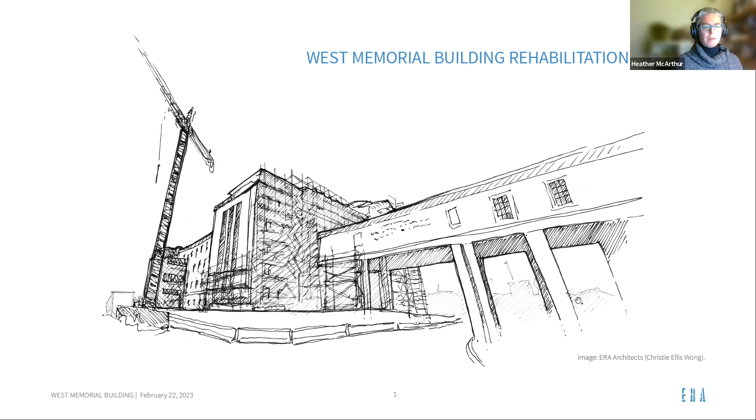I will start with an overview of the background analysis and studies that were undertaken to understand the building and its setting on Wellington Street, which have informed the conservation approach for the project. I will conclude with a brief project update illustrating how the conservation approach is being put into action in the ongoing rehabilitation work.

Starting with a brief background and historical overview of the building and its context. To situate the building and site, as Catherine mentioned, the West Memorial Building is located at the west end of Wellington Street. It's part of a monumental ensemble that was originally called the Veterans Memorial Buildings.

The East Memorial Building, which we see here on the left, was built first from 1950 to 1954, and the West Memorial Building, along with the Memorial Colonnade which joins the two buildings together across Lyon Street, was completed in 1958. The buildings are also connected through underground tunnels.

The design was awarded in the late 1940s to Allward and Gouinlock Architects of Toronto, who were involved in several projects for the federal government at the time, and I will touch on their experience a little bit later.

Developed adjacent to the Judicial and Parliamentary Precincts along what is now Confederation Boulevard, Ottawa's ceremonial route, the ensemble, and in particular the West Memorial Building, mark a prominent gateway to Wellington Street and the Federal Core.

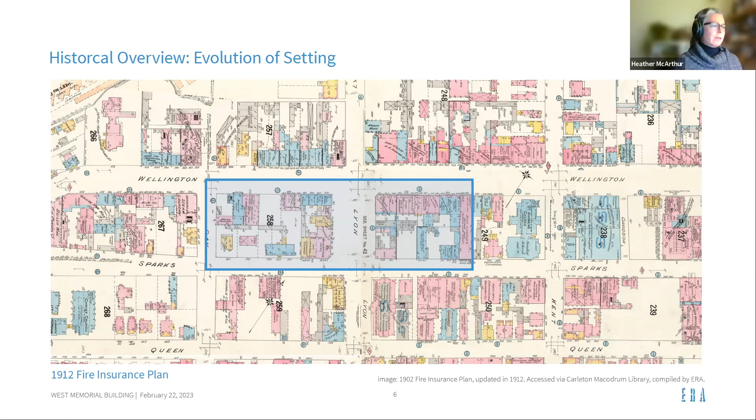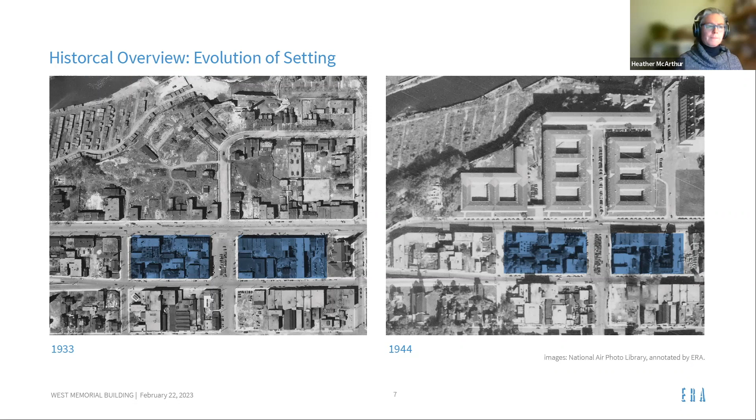At one time, there was also a market building called the Wellington Ward Market, which was located on Lyon Street between Queen and Sparks, just south of the East Memorial Building. This market building was intended to rival the Byward Market.

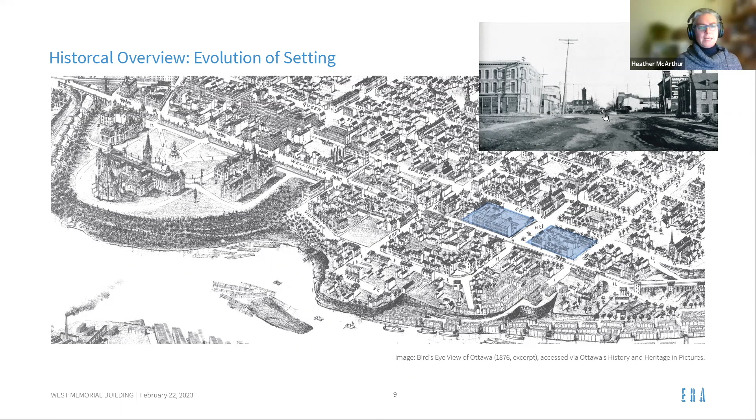As mentioned, this opening once featured a horse watering trough and would later accommodate car parking before making way for the memorial buildings. On the right, we see the intersection of Wellington and Bay Streets. This is Wellington crossing in front of our view and Bay Street going up to the right. As we know, this would become the signature view of the West Memorial Building ensemble and the gateway to Wellington Street. So we can see quite a contrast in the scale of what existed before this complex was constructed.

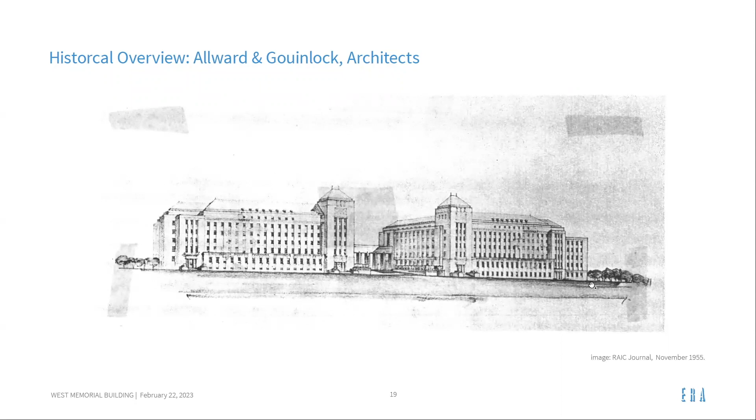It nonetheless uses a similar approach to interlocking geometrical forms which we see at the East and West Memorial buildings. The Memorial Building Ensemble has been suggested as a high point in Allward and Gouinlock's work.

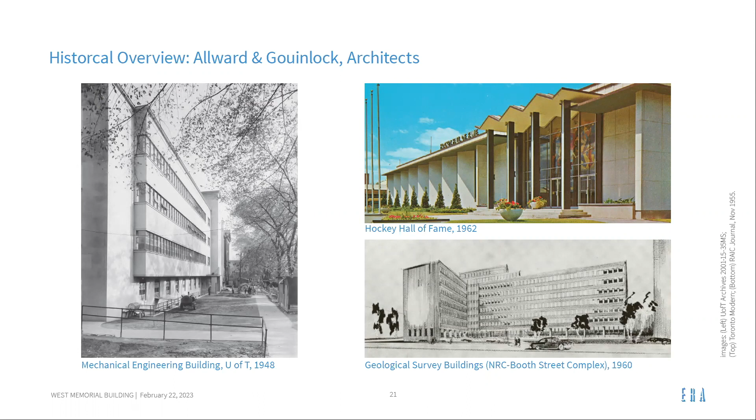So moving now to the original design of the buildings and its heritage character. Although much of Gréber's plan was unrealized, the vision for the western end of Wellington Street to serve as a gateway to the Judicial and Parliamentary Precincts was fully realized.

Part of which was to complete the town side of Wellington Street as a homogeneous and disciplined counterpart from the more picturesque pavilions, which we know exist on the north side of the street. This architectural discipline therefore called for an alignment of classically inspired building of uniform height and setback along Wellington.

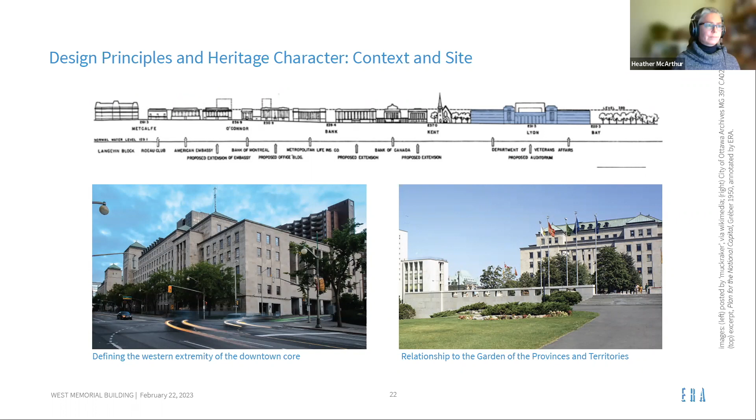The western end of Wellington would therefore be anchored by a monumental pair of buildings, which would act as a gateway with formal facades on both Wellington and Bay Streets, which we see here, this being Wellington, this is Bay, this is Lyon.

And which would dialogue with the green space that we know would come later, the Garden of the Provinces and Territories. Its integration with the nearby parliamentary precinct and with the street wall on the south side of Wellington was also achieved through the use of sloped and batten copper roofs, which acknowledged its federal context.

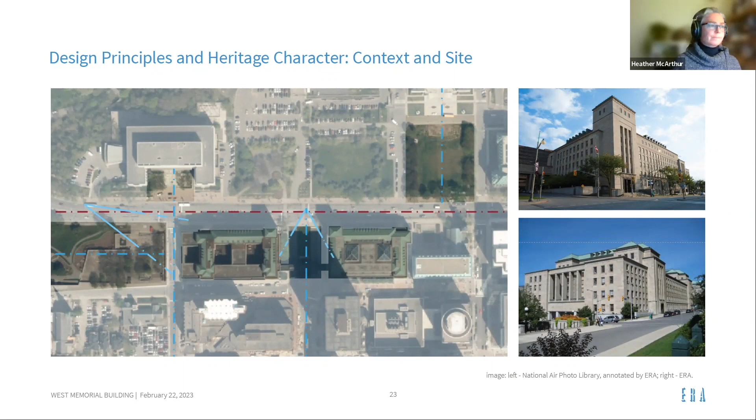The gateway function and monumentality are also expressed through the use of the classical moderne style. Elements of this style employed at the memorial buildings include a three-part composition of base, shaft, and capital.

Which are further emphasized by the stepped volume composition, highlighted here in blue, stepping back as the building goes up. This simultaneously refers back to the classical tradition, while integrating modern characteristics such as the interlocking geometrical forms, the restrained ornament such as flattened details and shallow piers, as well as the use of steel windows.

While the Gréber plan did dictate much of the design, some other notable principles are worth noting. We see the careful composition of the building facade, which connects the building to its context on all four sides, including multiple entrance points. The incorporation of Beaux-Arts influences is seen in the composition and symmetry of the ensemble, as well as the elevations, providing rhythm and proportion that reflect the interior layout.

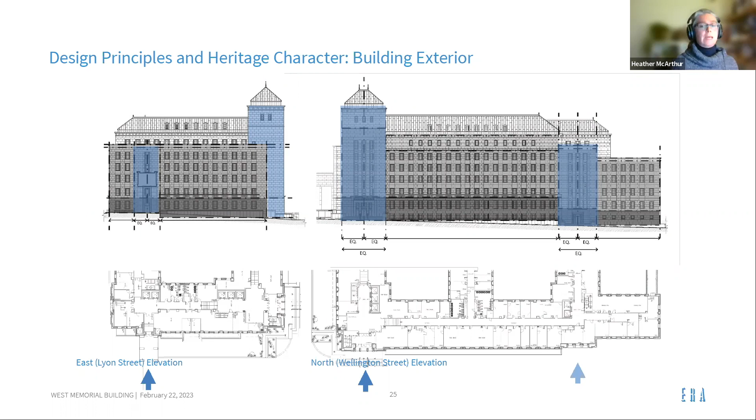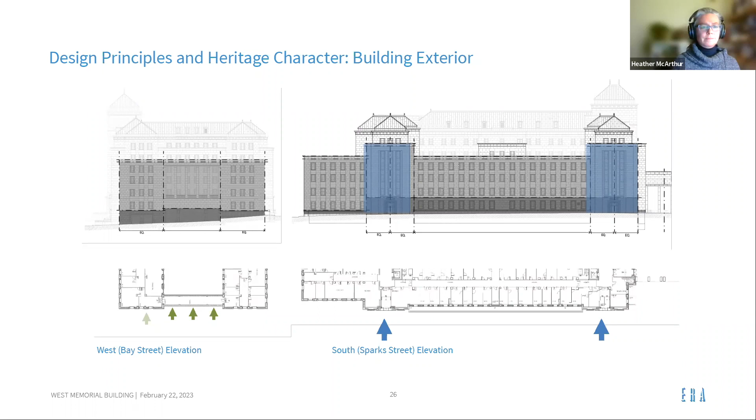Restraint of the classical moderne style also carries to a very controlled and balanced treatment of the landscape, in particular where the building meets the public realm. This approach gives a sense of grounding and permanence.

The design strategies include long window wells along the south, east, and north elevations. These are defined by granite-capped walls and contribute to emphasizing the stepped massing while highlighting the building entrances. At the entrances on Wellington Street, we see massive granite steps and sidewalls, which anchor the vertical volumes, especially at the Northeast Tower, seen here on the left.

The overlapping granite terraces along Lyon and Wellington Street further anchor the base of the building, seen here with the step planters, and then where it returns onto Lyon Street, it delimits the commemorative plaza. In contrast, on Wellington, we see soft landscaping between the entrances, which acts as a counterpoint to the hard surfaces and stair projections at those building entrances.

On the building interior, the entrance lobbies have the highest level of... sorry, let me just jump back for a second. So on the building interior, we're looking here at the circulation plans.

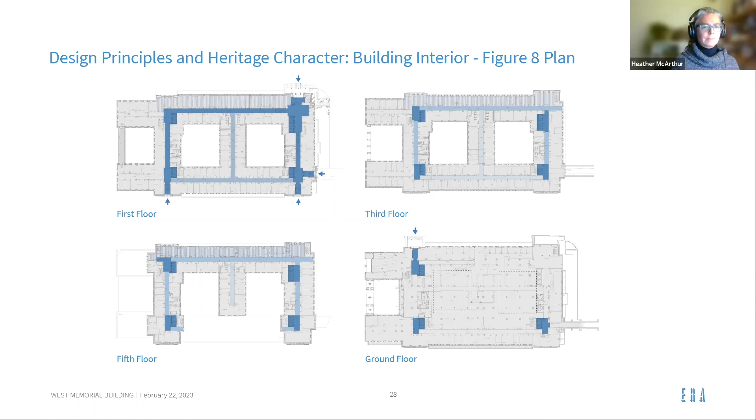The entrance lobbies have the highest level of finishes, establishing them as the most important of the interior public spaces. They're characterized by marble floors and full wall marble paneling, some of which is book matched. They also feature plaster cornices and ceilings, and painted metal elevator doors. Here we see the northeast lobby, the primary building entrance, with its material palette.

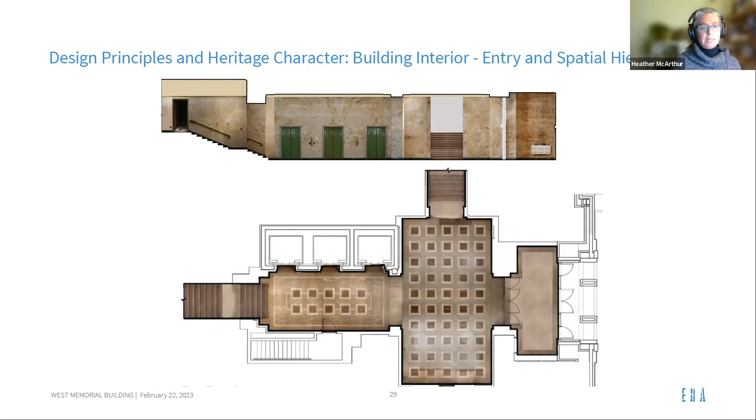The typical lobby material palette sets the stage for the character of other spaces in the building. The primary circulation, seen at left here on the main floor, has a similar material palette and expression as the lobbies on the first floor, whereas the secondary circulation, not shown, is more simplified with plaster walls and simple linoleum floors.

The fifth floor ministers' suites, seen here at the bottom, substitute the marble paneling of the public spaces with wood paneling, which speaks to the more private function of these spaces.

Although the different areas have different material palettes, there is an overall consistency in how the floors, walls, and ceilings are articulated and treated. For example, the baseboards are consistently of a contrasting material throughout the building, and the walls are often a series of horizontally stacked elements. The treatment of doors and frames is similar in all areas of the building.

Other characteristic features included an innovative strategy of flexible office space planning with movable wall partitions. And as mentioned earlier, the building arrangement around a pair of light wells came from a desire for wellness, affording office spaces with ample natural light and fresh air.

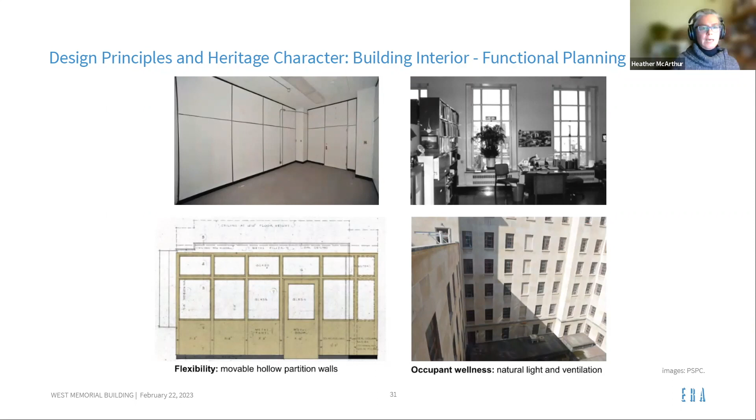Given this important history and context and the unique design of the building ensemble, the East and West Memorial buildings were designated a classified federal heritage building in 1992. The designation recognizes the building's strong contribution to the character of Wellington and Sparks Streets, notably their prominent position at the western gateway to the Judicial and Parliamentary Precincts.

The Colonnade over Lyon Street creates a prominent landmark as one travels along Wellington and along Lyon, and embodies the commemorative intention of the design. Finally, the designation recognizes the monumental permanence, which speaks to the memorial function, with the copper roofs also contributing to their association with the federal government and its grouping of buildings in the precincts.

So fast forward and switching gears, the East Memorial Building was renovated for the Department of Justice in the 1980s. Meanwhile, various uses were contemplated for the West Memorial Building. In 1998, the government agreed to a renovation to accommodate the National Archives. However, despite a number of approvals, these plans were never realized.

The last occupants moved out of the building in 2008, and the building has sat vacant ever since.

Coming to the present day, the West Memorial Building Rehabilitation Project has a mandate to rehabilitate and modernize all base building services and the building structure, including a full seismic upgrade as a key requirement of the structural design. The project also calls for ambitious energy targets, which require the building envelope to be substantially upgraded.

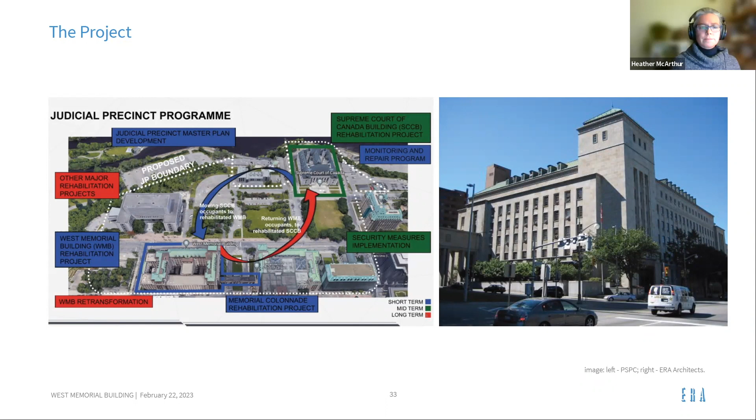So I will now describe our approach to the rehabilitation, which is guided by a heritage conservation framework developed for this project. The framework is grounded in the values-based process and principles of the standards and guidelines for the conservation of historic places in Canada, a document many of you will be familiar with. That document defines tools and processes intended to guide and ensure the conservation of heritage value and character as set out in the heritage designation, which I mentioned earlier.

The standards and guidelines advocate a process of understanding, planning, and intervening or implementation, which I will run through now as it was applied to the West Memorial Project.

I should also note that considerable work was undertaken by PSPC prior to the commencement of this project, including development of conservation recommendations and conservation guidelines for the building. This earlier work served as an excellent starting point, which we were able to build on and apply to the specific requirements of this rehabilitation project.

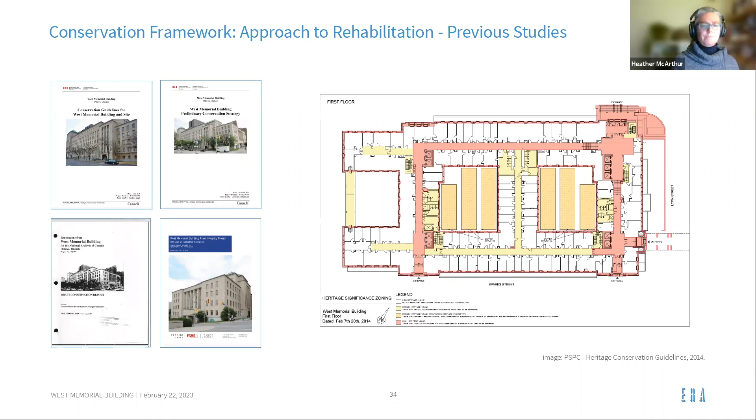So in terms of the understanding phase, much of that I went through earlier in terms of understanding the history and development of the building. This is how we started the project, with heritage background analysis and research. This allowed us to identify and develop a deeper understanding of the original design intent, the heritage values and characteristics associated with the building and site. This served as the basis for defining the conservation approach and goals for the project, and continues to guide decision-making in the current implementation phase.

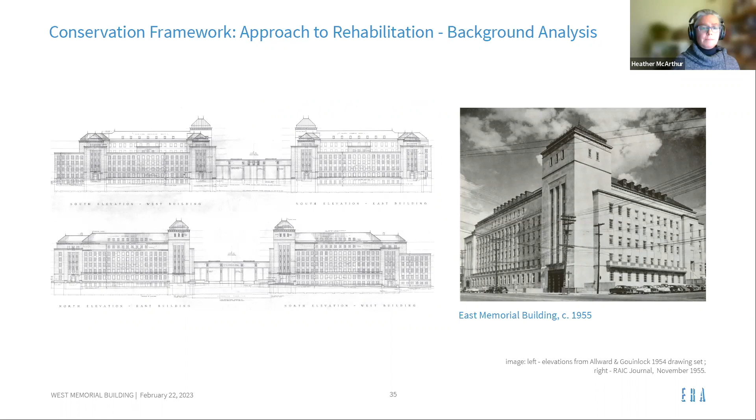At the same time, a program of condition assessments, investigations, and testing was initiated. This allowed us to understand the current condition of the heritage materials and their assemblies, including, as I mentioned earlier, the masonry, marble, bronze doors, steel windows, among other elements.

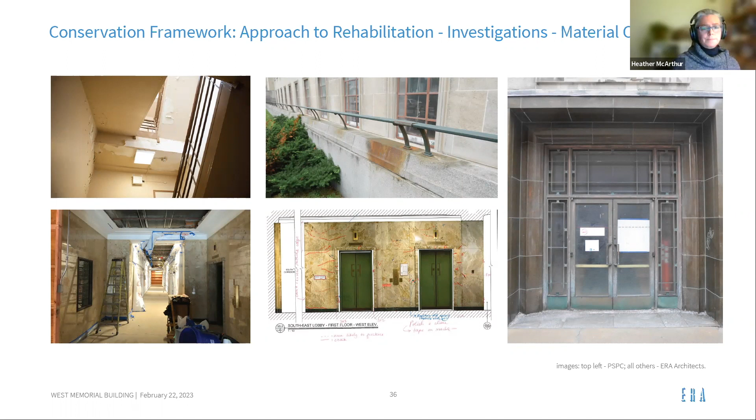In some cases, mock-ups and testing were required to better understand how some elements were constructed or assembled, or how they would respond to conservation treatments. These mock-ups and investigations allowed us to develop both a protection strategy for the heritage elements during construction, as well as a repair and rehabilitation approach for each material type.

One example is the attachment of the marble wall panels, which could only be fully understood by testing their removal and reinstatement. Similarly, a mock-up was undertaken involving the complete disassembly of an original window into its component parts to understand how it was constructed and assembled. This would allow us to develop the rehabilitation approach for the windows.

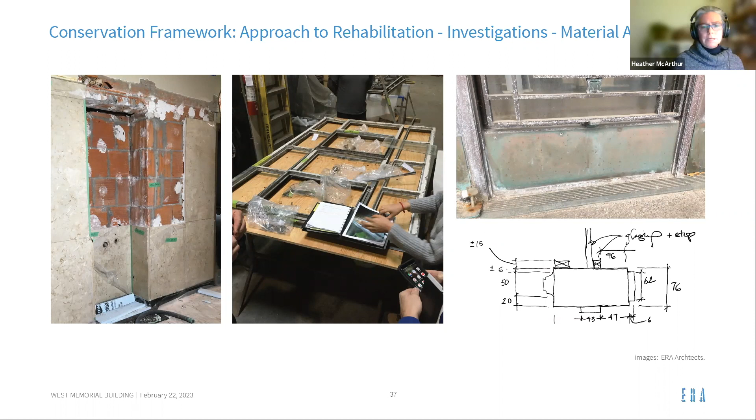Elsewhere, using a heritage asset inventory developed during the preparatory work, we implemented a system for cataloging and tracking all heritage elements during the design and construction phase. As items are removed, they're tagged and cataloged, and their conservation treatment is identified.

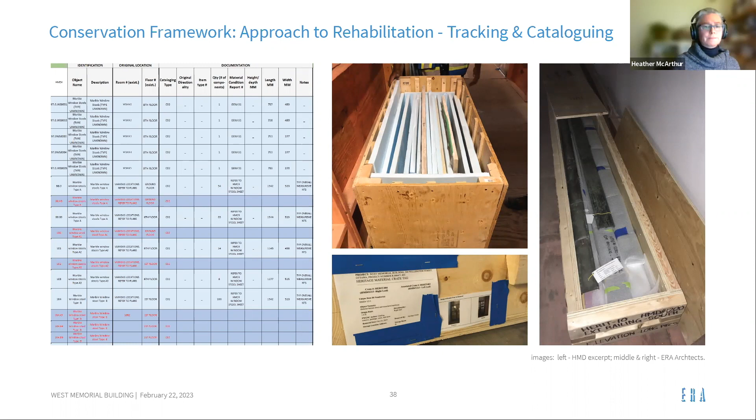At the same time, protection was installed for the heritage fabric remaining in the building when the window openings were protected, and a system was developed for monitoring the in situ heritage fabric during construction, namely vibration monitoring. As you can imagine, demolition and removal activities can cause a lot of vibration and movement in the building, which could affect the attachment of heritage fabric, notably the marble wall panels. In real time, the vibration monitors would indicate when movement is detected, and when thresholds were exceeded, we'd work with the contractor to review their tool selection or methodologies in these highly sensitive areas.

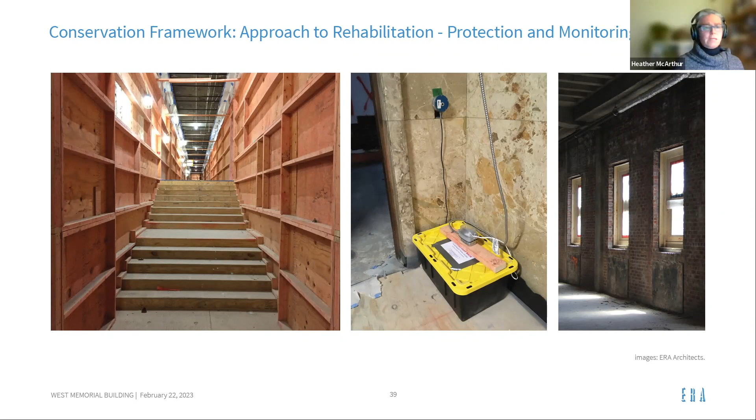Combined, these studies, background research, and investigations have helped us to understand the original design intent for the building and site, including how these have been maintained and in some cases evolved over time. With this information and understanding in hand, the team could get to work developing the conservation goals and strategies that would guide the design of interventions needed to meet the requirements of the new program.

So I'll quickly run through the conservation goals for the project. A key objective was to address the requirements of the new program, both the interim use and long-term use, in a manner that would conserve the heritage value and character of the building and its site.

A principal challenge is fitting a very specific interim program, including courtroom functions, into a building that has very strong and defined formal characteristics, as we've seen previously. To facilitate this, we developed a set of conservation goals and strategies to help guide our work at every scale.

The overarching conservation goal is to meet the functional and technical requirements for both the interim and long-term programs, while reinforcing the building's Beaux-Arts space planning and Classical Moderne qualities. This goal takes into consideration the requirements for flexibility of use while providing base building upgrades in a manner that would minimize impact on heritage character.

In terms of the contemporary layer, this would require working within available floor space, and you may have guessed by now, using the light wells as an opportunity for expansion. Any external additions would need to be minimal and subordinate to the building and setting.

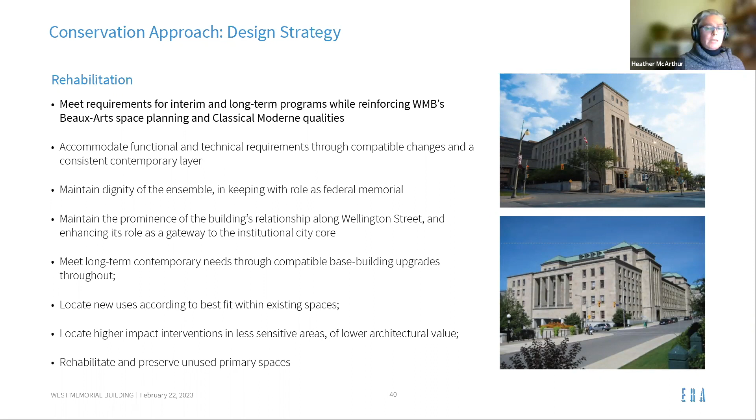Starting at the macro scale, looking at the building in relation to its site, the aim was to maintain and reinforce the formal quality and symmetry of the East and West Memorial buildings linked by the Memorial Colonnade and its central plaza. The formal Beaux-Arts composition should continue to be read as a balanced and unified complex. This would also include maintaining the prominence of the building's relationship along Wellington Street and enhancing its role as the western gateway to the federal core.

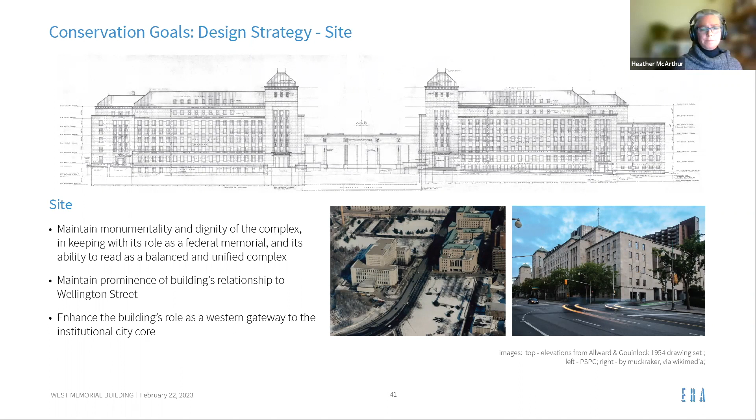In terms of the building exterior, the goal is twofold. On one hand, the aim is to maintain the characteristic massing of the building by locating any required additions where they would have least impact on the site and the external composition of the facades. On the other hand, the goal aims at maintaining the appearance of the building envelope by accommodating base building upgrades on the interior of the building. In this way, the original steel windows and the exterior stone facade and copper roof would be maintained.

With regards to the interior, the goal and supporting strategies were threefold. On one hand, the goal is to maintain the original approach to spatial organization and hierarchy, which I highlighted earlier. That is, maintaining the configuration of the corridors, notably that Figure 8 plan, and preserving the relative prominence of primary areas such as the marble-clad entrance lobbies.

We also aim to minimize impacts to areas of high heritage value by concentrating modifications in lower heritage value or non-character defining elements. The goal is to promote use in areas of high heritage value by maintaining their original purpose, such as maintaining an entrance lobby as an entrance lobby.

And finally, to guide the design of the contemporary layer, the aim is to ensure that alterations or additions are conceived as part of a cohesive layer that complements the Beaux-Arts spatial planning and the classical modern aesthetic of the original design.

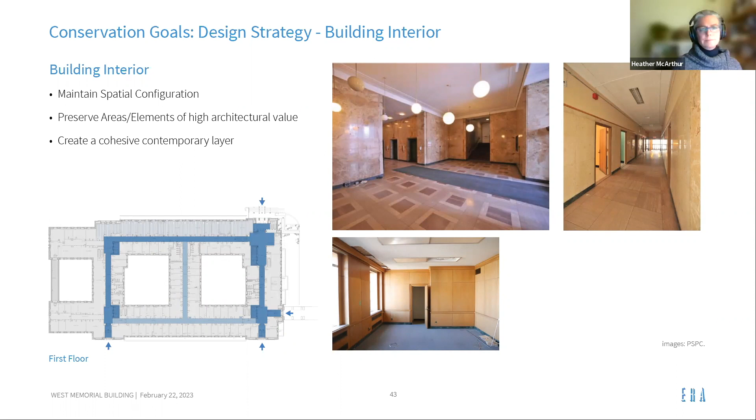So how does this all play out in practice? Well, I'll use the design renderings prepared by Regenerate 344, the prime architects, to describe how the conservation goals and strategies are implemented throughout the project and how the building's heritage character is being protected.

While meeting contemporary requirements, starting at the building exterior, the strategies have been informed by the goal of maintaining the monumentality of the memorial complex, in particular its relationship with Wellington Street, while enhancing its role as a gateway to the city core. As noted earlier, the tight building footprint and desire to maintain the axial symmetry of the overall complex offered little opportunity for additions outside the building footprint.

As a result, the formal Beaux-Arts composition and the ensemble is protected by fitting all new functions within the existing footprint. The building's west elevation, which you don't see here, remains, and its heritage character and relationship to its environment are conserved.

Strategies related to the exterior have also been informed by the desire to maintain the integrity of the building's current appearance. As mentioned earlier, no substantial additions are required on the exterior, leaving the building's original composition unchanged. Similarly, the base building upgrades are accommodated within the building without impacting its exterior finishes and fabric.

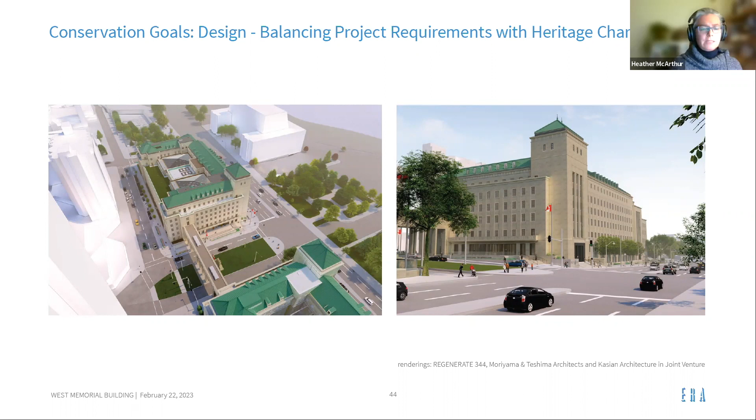There will be some modifications, however. I'll jump back to this one on the east elevation of the building to incorporate a new public entrance facing the central plaza. The intervention is planned to be fully reversible, with all salvage material being cataloged and stored offsite to allow for future reinstatement.

As mentioned, the east and west light wells are identified as suitable for accommodating the large courtroom and assembly hall functions. While the light wells become interior spaces, they will remain largely legible and distinct from the original floor plate of the building.

So generally speaking, the required modifications have been concentrated in areas of low heritage value, and major changes are concentrated in areas also of lower impact.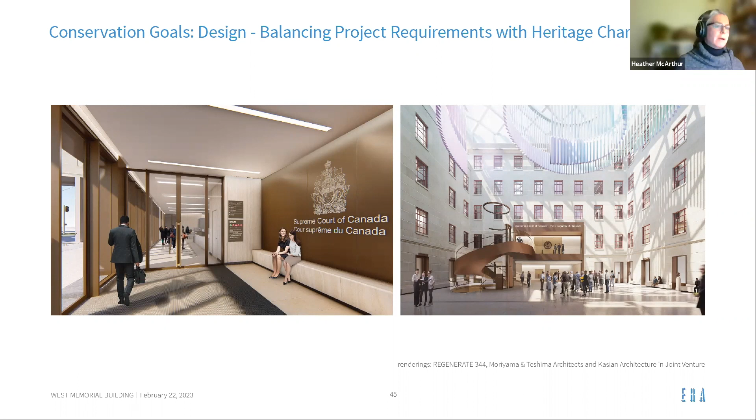This brings us to the current phase, the project implementation. I'll conclude with a few images of ongoing and current project activity, which illustrate how the building's heritage fabric and original design intent are being preserved in practice. This will hopefully give you a glimpse of what's happening behind the scaffold and inside the building and in various workshops around the city.

Starting with the interior, the project began with a demolition and abatement phase, which required removal of non-heritage building elements and abatement of designated substances, both needed to prepare the building for new construction.

Exposing the original structure allows for the seismic retrofit and structural reinforcing, as well as the installation of new mechanical and electrical systems. It also provides an opportunity to make the building envelope upgrades from the building interior rather than the exterior, which allows the exterior appearance, the masonry, windows, roofs to be preserved.

At the same time, the heritage finishes that would remain in the building are protected during construction, namely the marble-clad walls and floors, to protect the elements from adjacent activities.

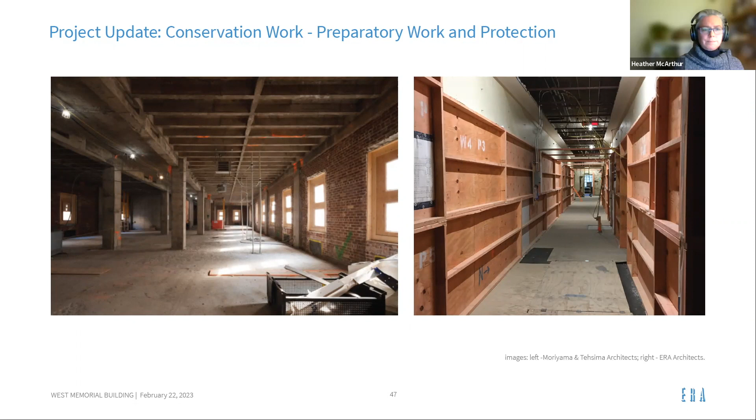On the exterior, we're undertaking a masonry restoration campaign, working elevation by elevation. The exterior masonry is being cleaned and repaired, and all masonry joints are being repointed. This work is undertaken after a comprehensive survey of existing conditions, which I spoke to earlier.

As you can see in these images, this involves very detailed and very skilled work. And so far, we think it's actually looking really quite beautiful.

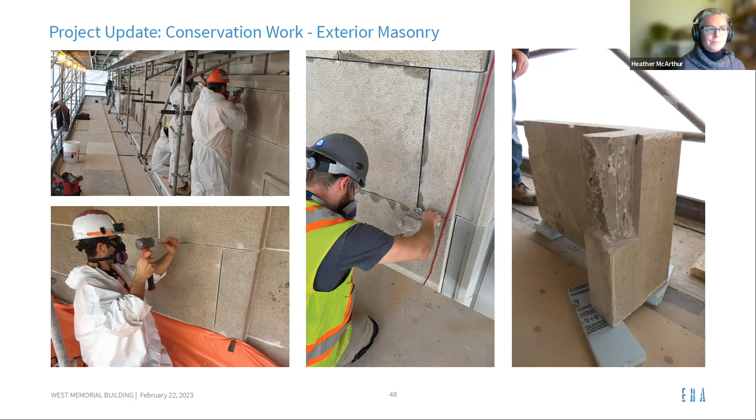Also on the exterior, the window restoration scope is underway. The original steel windows and terrace doors are being preserved. This requires removal of the windows to a shop setting where the frames are completely disassembled, paint finishes are removed, and damages repaired. The original hardware is refinished, and in some cases missing components need to be cast new, as we see here with the handles, the original window handles and replacement handles.

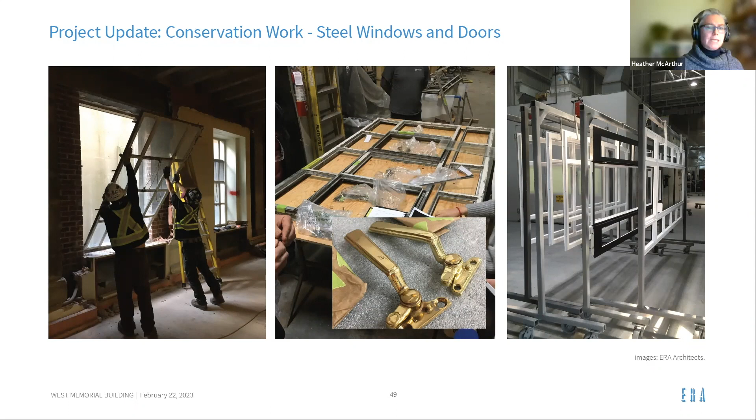Finally, the windows are repainted and reassembled before being brought back to site for reinstallation in their original openings. And if you've passed by the building recently, you may have noticed that the windows are now painted black instead of the red color that was on the building when the project started.

As part of this scope and the investigation phase, we undertook a paint analysis, which determined that the original color of the windows was actually black. So the decision was taken to revert back to that original condition. And we think the black is looking fabulous.

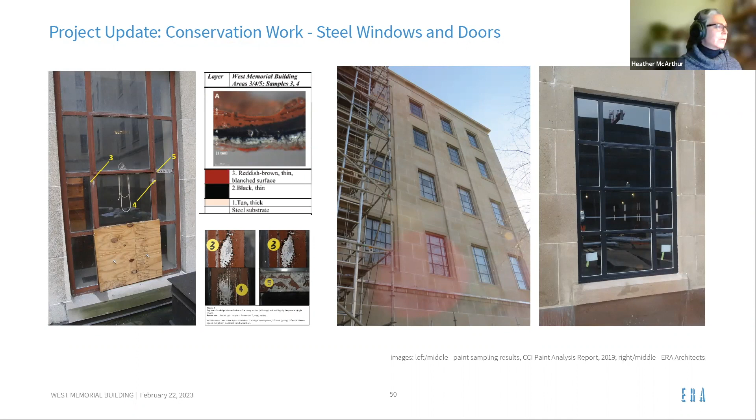Moving up to the roof, the overall roof assembly was original to the building and closing in on 60 years of age. While the copper skin was in reasonable condition, the roof deck was deteriorated. In order to replace it, the entire roof assembly had to be removed and a new roof deck and membranes installed. All new copper roofing is now being installed, including finials and snow guards, provided to match the original in form and in detailing.

More recently on site in the courtyards, the structure for the courtyard skylights is being installed and a new floor deck is being provided inside the light wells. This is actually a really interesting and challenging part of the project, not just the installation process itself, but from the conservation perspective, the question of how to reconcile the joint where the new fabric, the skylight, will meet and integrate with the old fabric, the limestone clad walls.

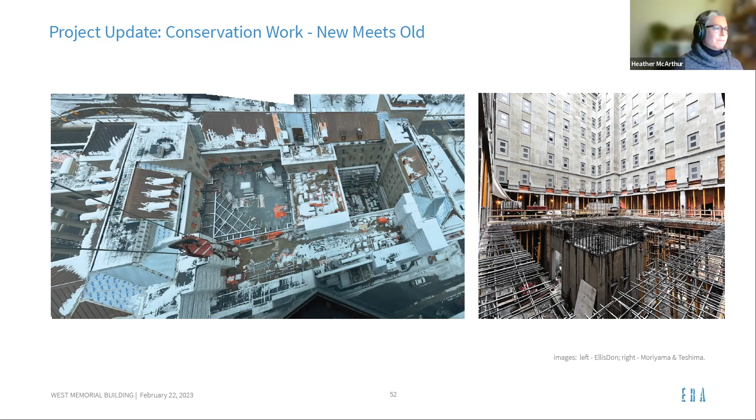We want to do this in a way that is both seamless and compatible with the original design intent and also compatible with the original materials. So this work is ongoing. We don't have any process photos to share at this time, but this is a fun and interesting part of the project.

Moving to the interior and its heritage finishes, we'll start with the marble flooring and wall paneling, which are being preserved. Located mostly at the main floor and at all building entrances, the marble is being cleaned and repaired. Where marble has been removed to facilitate other work, such as structural upgrades, it's repaired in a shop setting and stored off-site until reinstalled. The in situ marble remains behind protection, and when the project reaches that phase, the protection will be removed and that marble will be repaired on site.

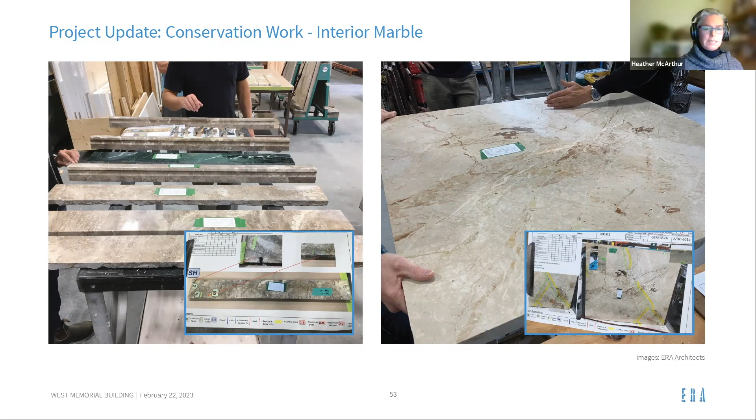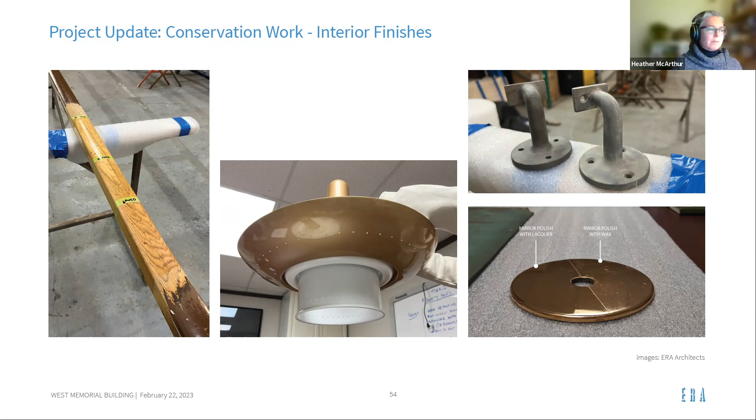Similar work is being undertaken on other interior finishes, including the wood stair handrails, original clocks, and light fixtures. Here we see brackets for the handrails and other elements that will be reinstalled in the building lobbies. The elevator cab interiors, which remain largely intact, will also be rehabilitated and adapted to meet current accessibility and other standards. Integrating new elements such as handrails, lighting, and control panels seamlessly is another interesting challenge. Decisions on how to modify the original fabric to accommodate these new elements are guided by the conservation strategies and goals described earlier.

I'll end the presentation on these concluding images, with a parting note that it's been very exciting and rewarding to work on this project and see the gradual unveiling of the building as each segment of scaffold comes down. I also want to give recognition, as I alluded to earlier, to all the highly skilled tradespeople and conservators we're fortunate to work with. As consultants, we design the conservation approach and the interventions on paper, but the real success comes when the project is actually implemented. I hope you share my enthusiasm that the building is looking beautiful.

That concludes the presentation. Thank you for your time and your interest. I think Leslie is going to moderate the Q&A session, and I'm happy to take any comments or questions.